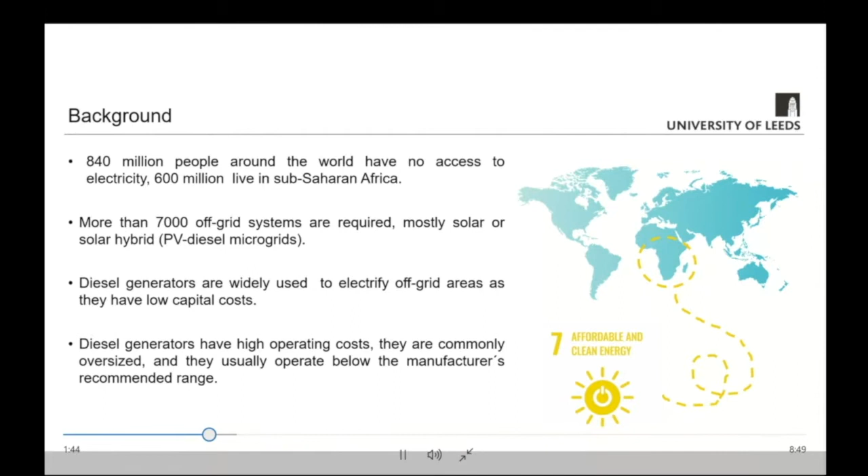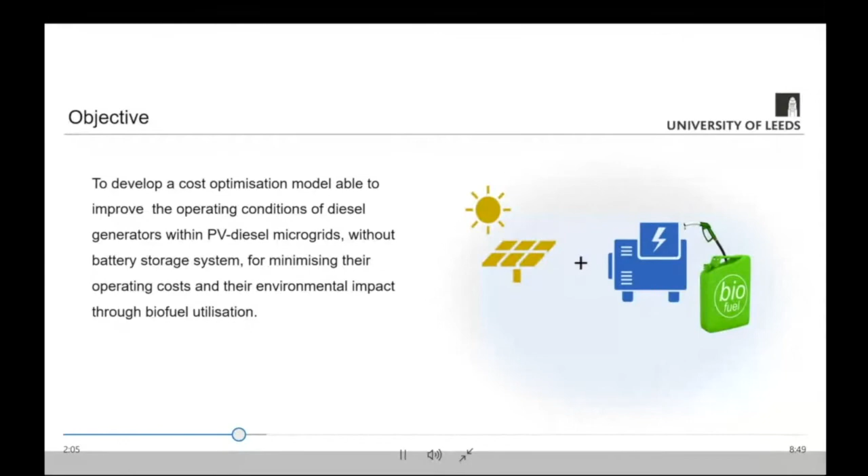Considering the background explained, the objective of my project is to develop a cost optimization model able to improve the operating conditions of diesel generators within PV diesel microgrids without battery storage for minimizing their operating costs and their environmental impact through biofuel utilization.

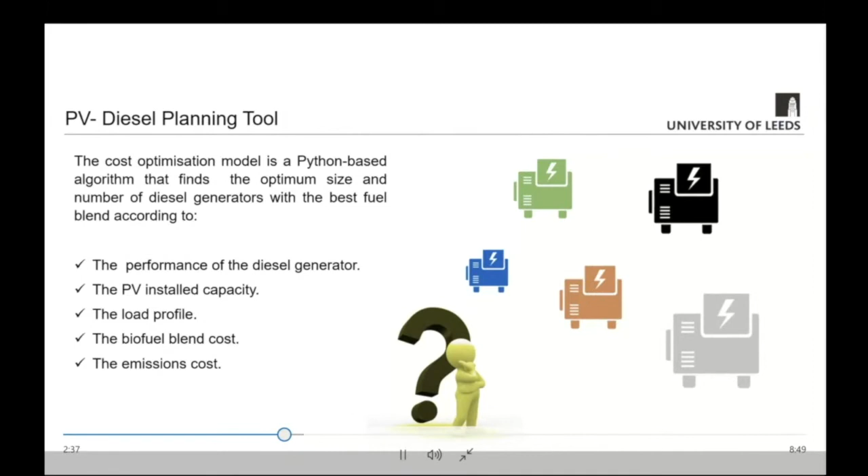Now, let me talk about the planning tool. As mentioned in the objective, I developed a cost optimization model, which is a Python-based algorithm that finds the optimum size and number of diesel generators to operate with the best fuel blend according to the performance of the diesel generator, the PV installed capacity, the load profile, the biofuel blend cost, and the emission cost. I will be explaining a little bit more about these factors in the coming slides.

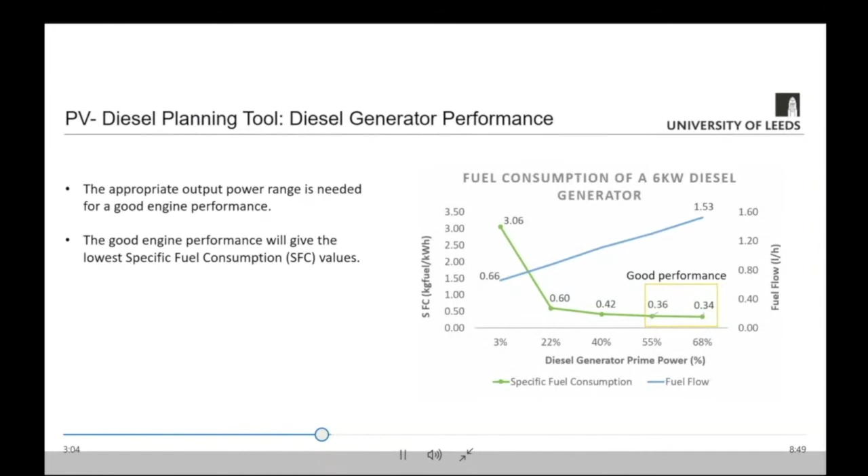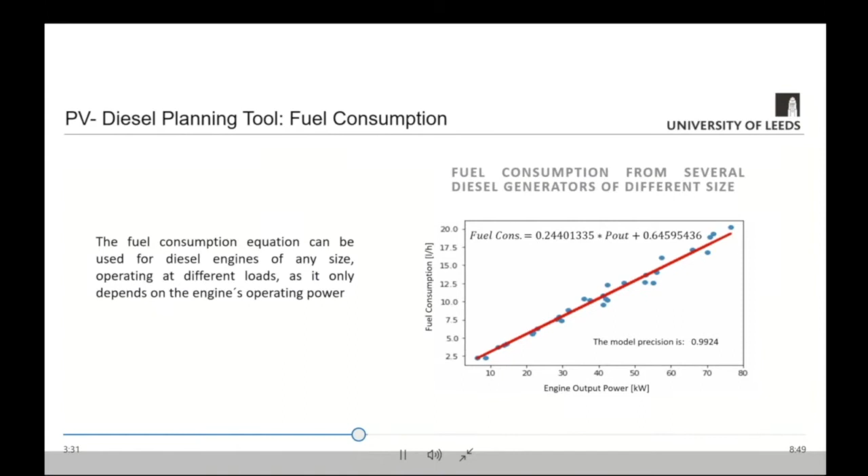The algorithm also considers the effect of available PV output power and the load demand on the engine's performance. This is relevant in the planning stage because having undersized PV diesel systems increases the fuel consumption as more power is required from the generator. It is also important to prevent having a high PV share and a low demand system because it will decrease the engine's performance, leading to higher operating costs.

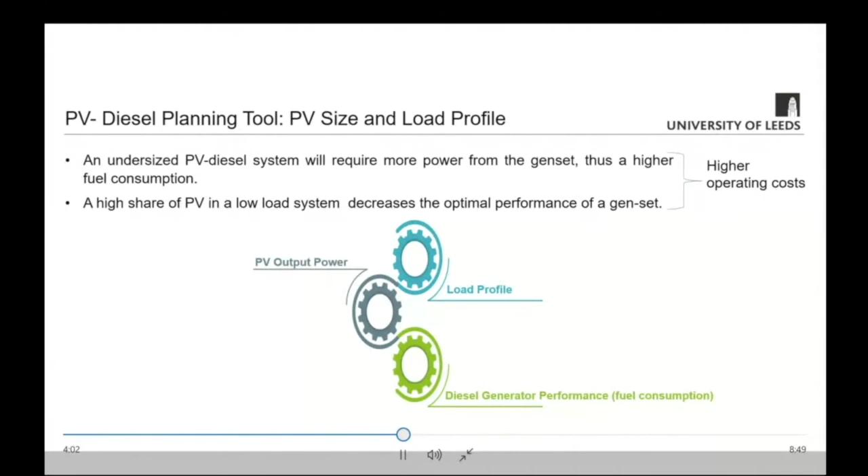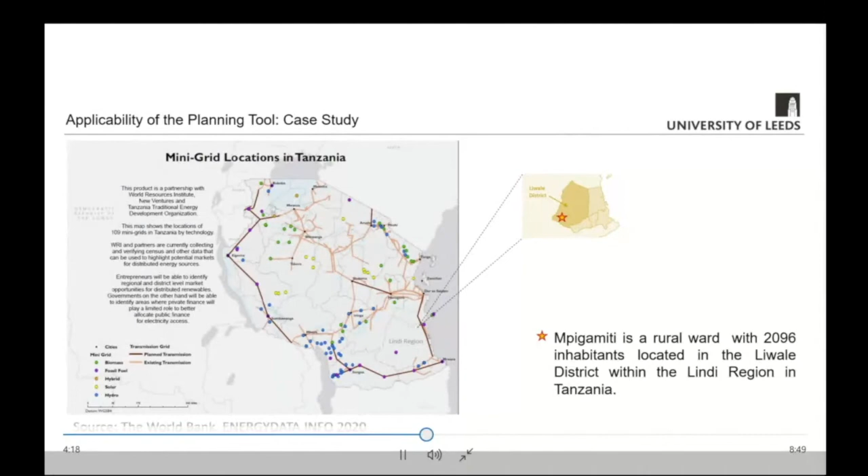To visualize the applicability of the planning tool, I will present a case study of Mpigamiti, a rural area located within the Lindi region in Tanzania. The algorithm needs a load profile and a PV output power for selecting the diesel generators. Therefore, 3 load profiles were created using the load profile tool developed by the National Renewable Energy Laboratory.

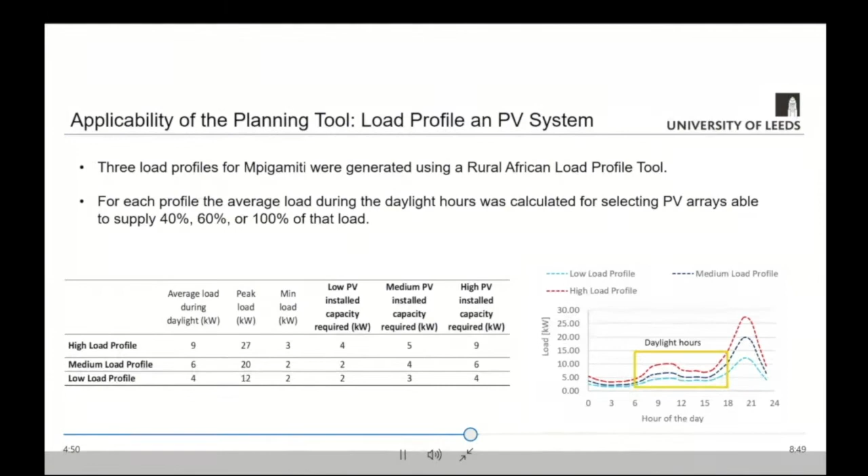For each profile, the average load during the daylight hours from 6 a.m. to 6 p.m. was calculated for selecting suitable PV arrays to supply 40, 60, or 100% of that load. This was done to assess the impact of the load and the size of the PV system on the generator selection.

For every PV array, the hourly output power was calculated with the help of the interactive tool from the European Commission using solar radiation data from the year 2016. A K-means algorithm was needed to find three representative operating conditions for each PV array. The operating conditions include a high, a regular, or a low PV performance, and they would require different power from the diesel generators. Therefore, the operating cost will be affected.

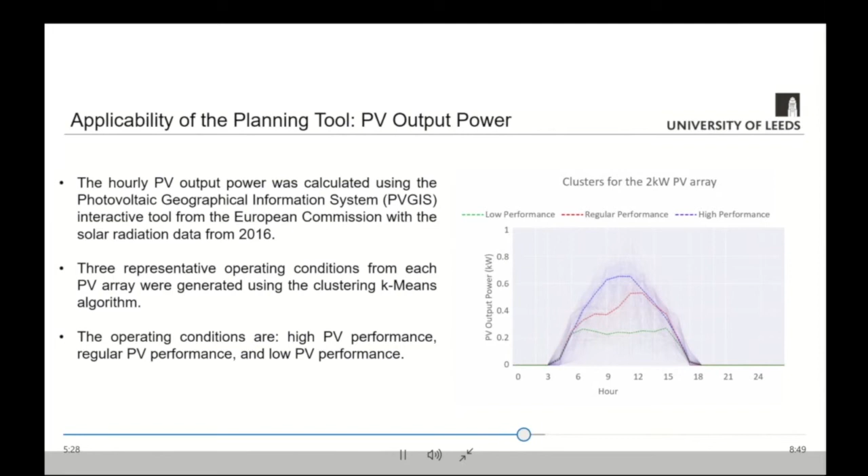The other relevant inputs for using this planning tool are the diesel generator capital cost, the blend cost, and the emission cost, where both the blend and the emission cost are a function of the fuel consumption equation, and they are always affected by the amount of biofuel included in the blend. All of these costs are minimized in the objective function of the optimization problem, but you will see how the blend operating costs have a great impact on the final cost, depending on the operating conditions of the whole system.

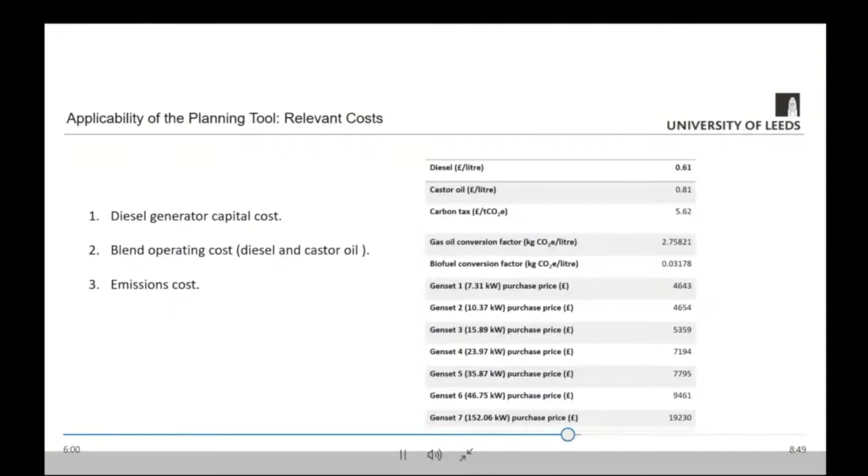Here you have a summary for the best and worst case scenarios from the high and the medium load profiles, with their respective PV installed capacity and the PV operating performance. From the possible options, the best scenario was always the one having a high PV installed capacity with a high PV operating performance. This is attributed to the fuel consumption during the daylight hours and by having the right size of operating generators all the time. From the tables, you can see how for the same load profile with a different PV array, different engines are required and they have different operating costs depending on their fuel consumption.

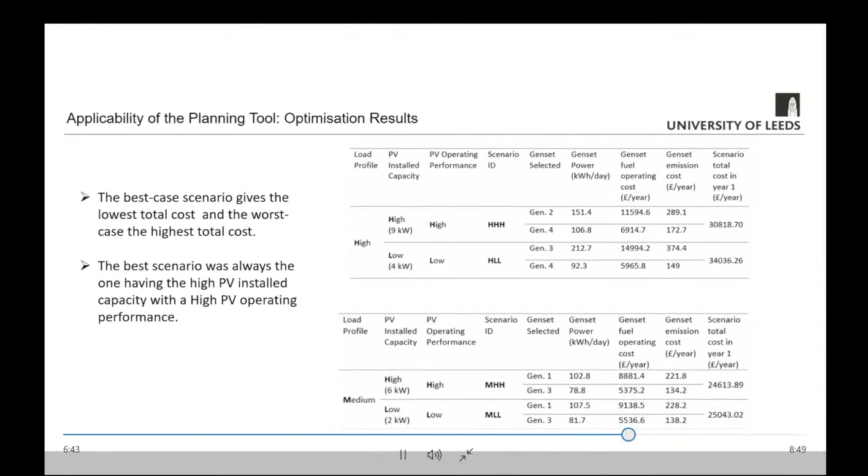These are the optimization results from the low profile. This scenario uses similar PV arrays as those from the high and medium load profiles, but it has different operating costs due to the different load demand. Still, all the costs are minimized and the engine performance is within the recommended parameters to avoid unexpected fuel consumption and higher operating costs. I should mention that for the example presented, no castor oil was included in the blend due to the low diesel purchase price and the low carbon tax considered for the location.

If this carbon tax is maintained, the castor oil price should be as low as 0.63 pounds per liter for the model to select another blend. On the other hand, if the fuel prices are maintained, the carbon tax should go as high as 70 pounds per ton of CO2 equivalent for the model to select a different blend.

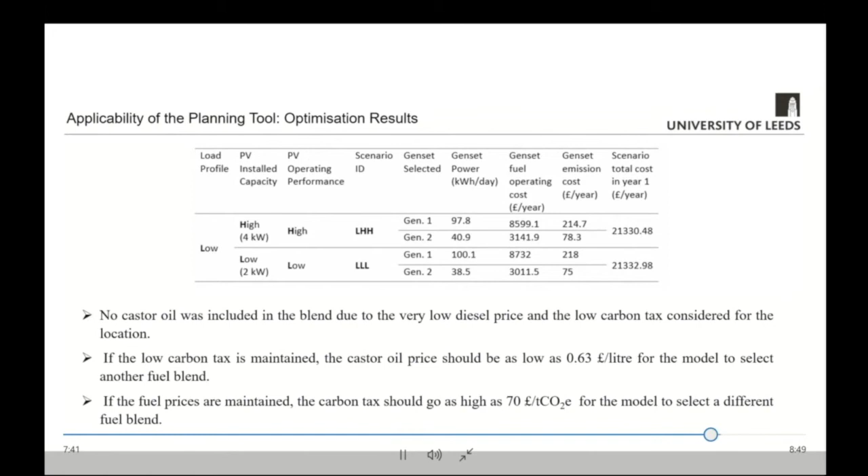Finally, let me mention some conclusions of this work. It is possible to minimize the operating cost of diesel generators as it mainly depends on its performance, but we should be aware that it is easily affected by the load and the share of PV included in the system. We should remember that using a generator or a PV array of the same characteristics under different operating conditions will impact the final cost. Therefore, special attention should be given to the generator's performance during the planning stage for better sizing and selection without underestimating the fuel consumption cost or the environmental implications related to diesel or biofuel utilization.

As the selection of a biofuel blend depends on the local prices, for sustainability reasons, the fuel selection could be predefined. This planning tool integrates all of these elements and could be helpful to design more sustainable systems.

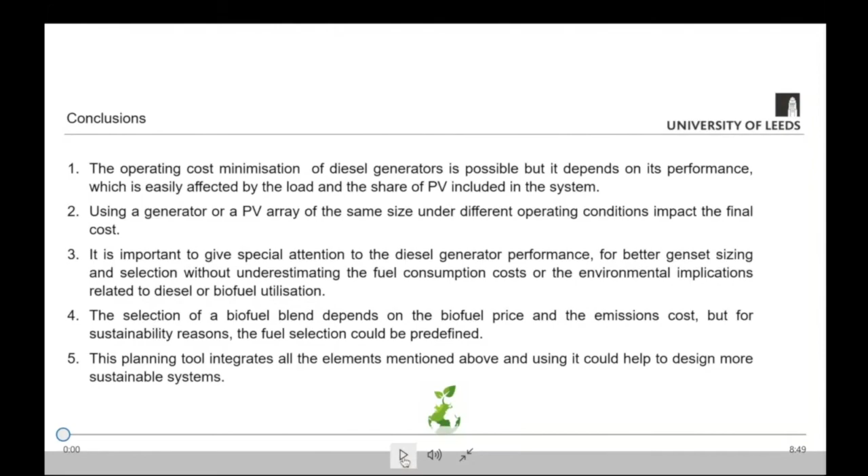Thank you very much, Nina. Nina, are you there? Can you unmute? Yeah. Sorry, I was having technical difficulties. That's why I just asked you to share the video. But yes, absolutely, I'm here. So no problem. That's what we have the videos for. So thank you very much for the nice presentation. I will check to see if there are any questions at this point. Not yet.

Let me start off by asking a question myself. I will go back to what Shahab mentioned at some point about the availability of data. You need even more data for the work that you're doing. So you need data on carbon tax, on fuel, the cost of transportation of fuel into different locations, PVs, because you need that, some estimation of the loads.

So what was your experience trying to get this data for specific locations? How easy was it? What assumptions did you have to make? Can you give a comment on that? Yeah, that's really a tough question, because finding data, I think, is the most difficult part of any project, because as mentioned earlier during this session, there is not enough estimation of the electricity utilization, especially in rural areas or in areas that are not really connected yet. So that was the first problem I faced, finding some load data.